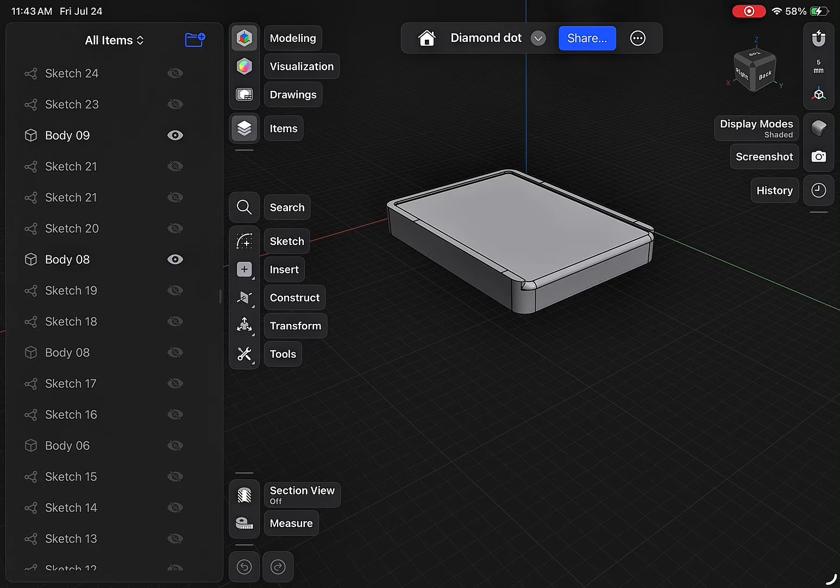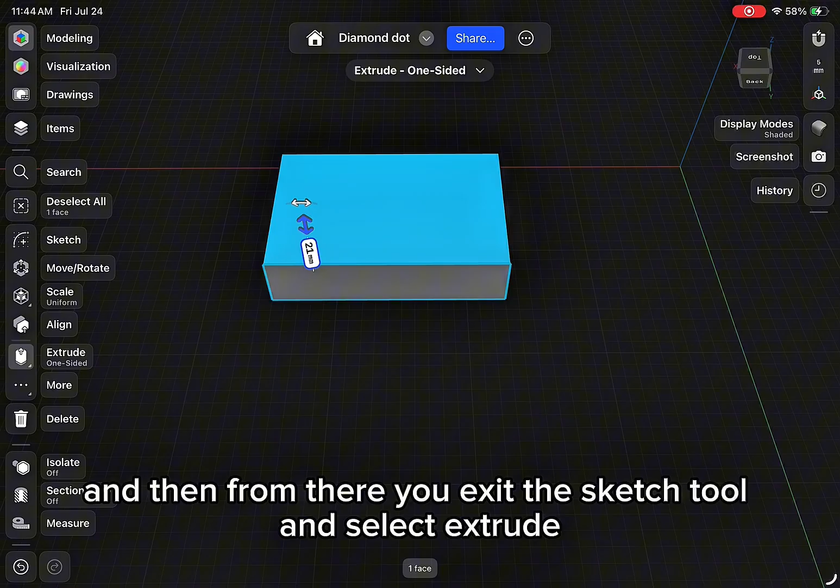Hi everyone, Steph from Pages and Projects here, and I am going to show you guys how I designed something in Shapr3D. So here you go into the sketch tool, and I'm using the rectangle to just create an outline, and then from there you exit the sketch tool and select extrude. From here I'm using the shell tool to get that nice shell.

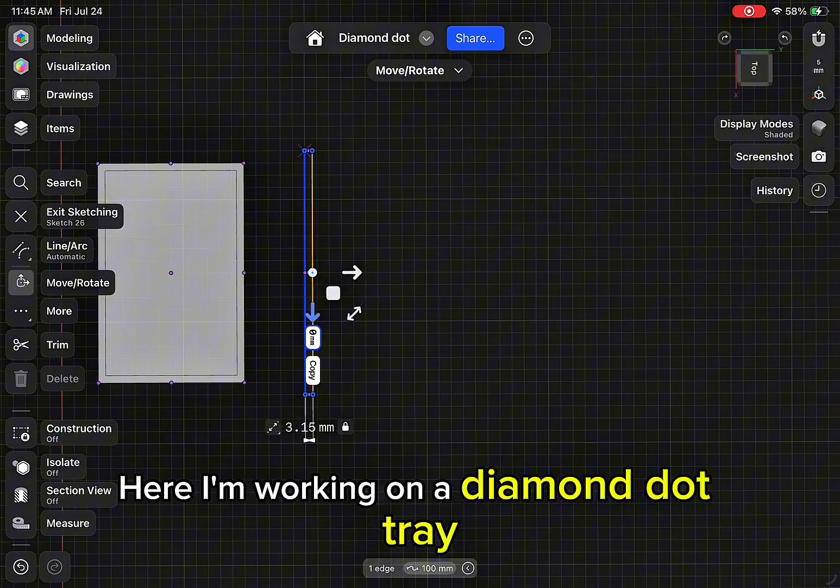From here, I am going to start working on what will become a pattern that I will then project onto my rectangle here. I'm working on a diamond dot tray. So this tray is going to help store and sort the little diamond dots when I'm working on stuff. So I'm making, again, a pattern here for those slots in the diamond dot tray, which I will then project.

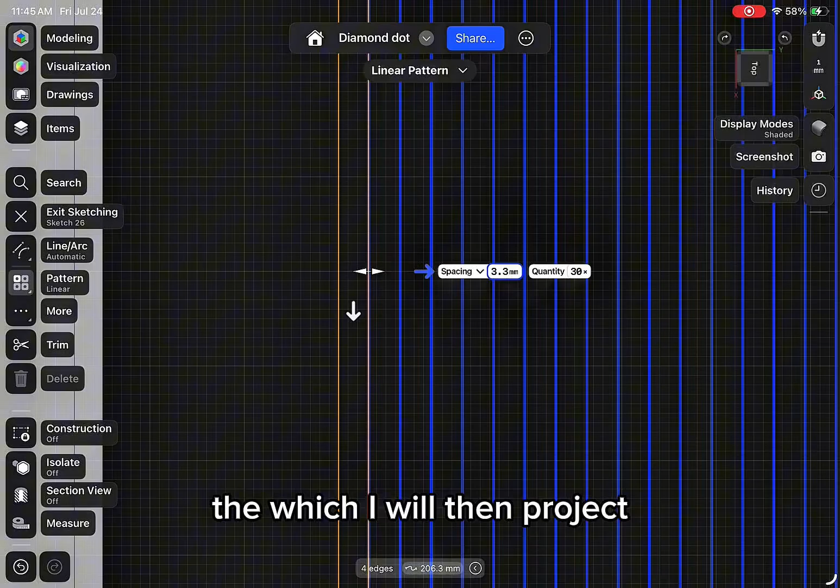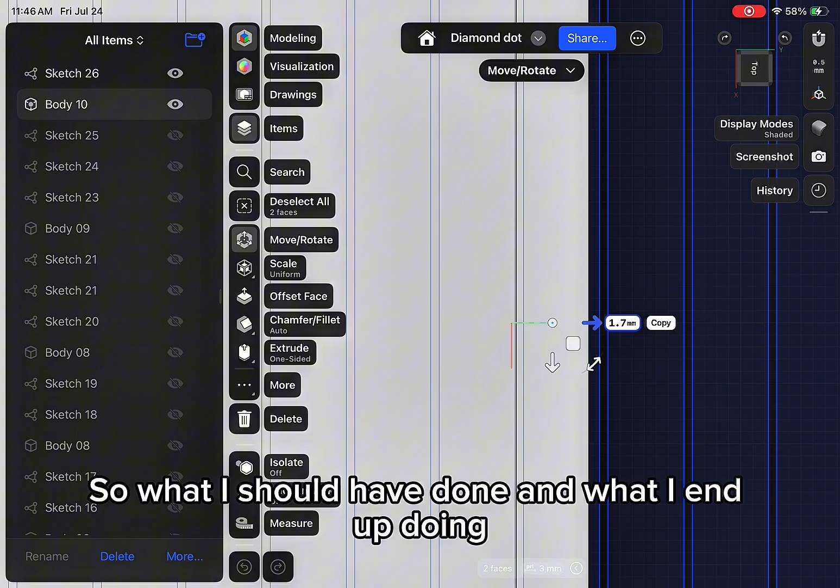What I end up realizing is that because I don't actually want to project this whole pattern against the full shape here, I actually want the little indents or ridges to be sort of within, like I want blank spaces above or below. So what I should have done and what I end up doing is create a rectangle essentially to project onto the space there before projecting this pattern on there.

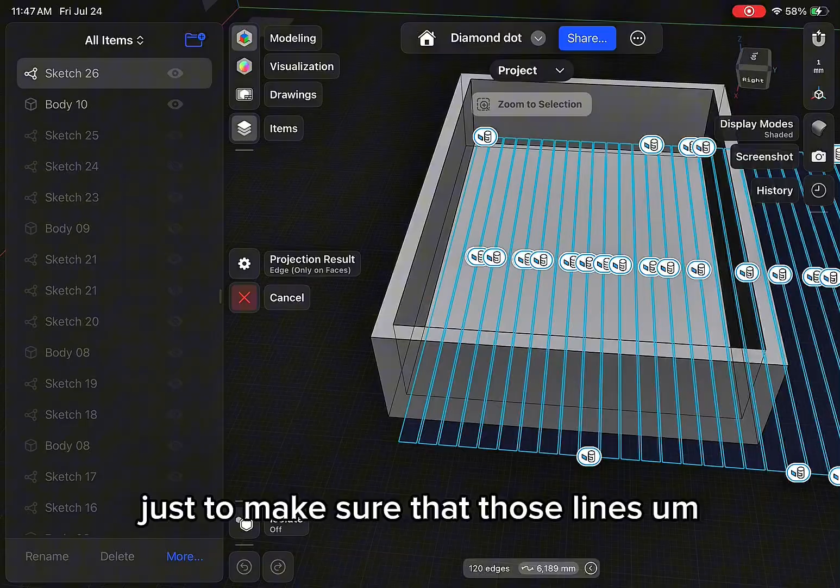And then you'll see here. So I am just messing with the overall shape just to make sure that those lines sort of match in there perfectly. And then from there, I projected it. So here I am now realizing the error of my ways. So I am debating on what to do next here.

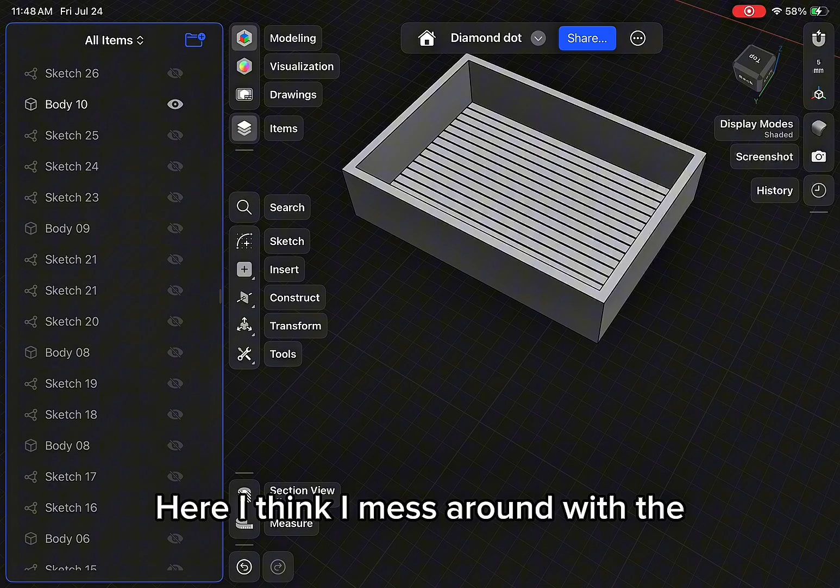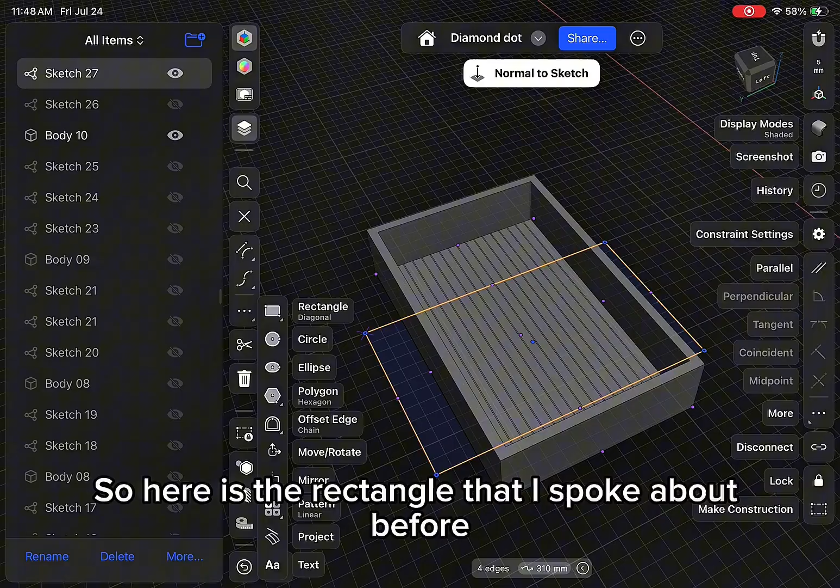I think I mess around with the top and bottom pieces to see if I pull them out to see if that would work. So I select the top and bottom face there, and then I use the move tool to sort of drag that down. But as you can see, it just drags the lines with you. So here is the rectangle that I spoke about before. But the problem here is if I project it at this point, I'm going to have to select every single face in between those lines.

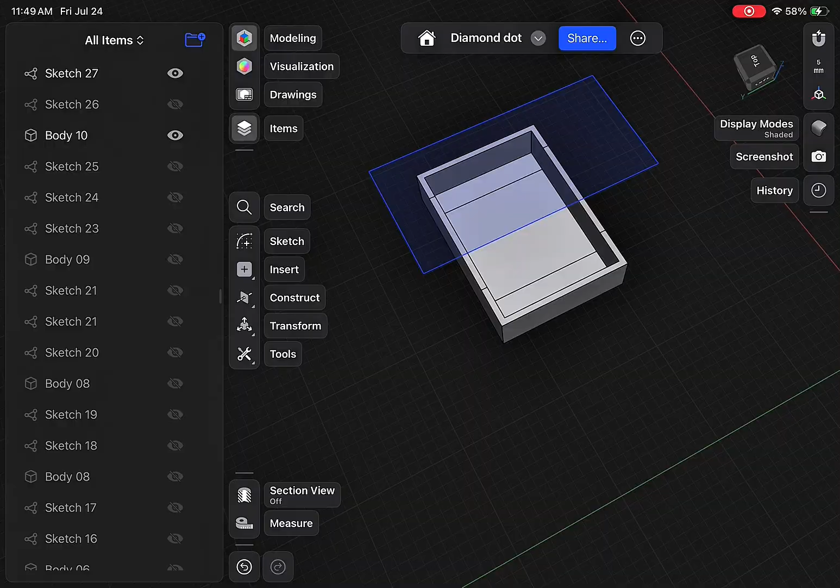So here I end up undoing a few steps. I go back, I start with the rectangle, I project those two lines onto that surface as a step one, and then I take my pattern and then I project that onto just that middle section there. So it sort of separates it out. And there you have it. And that's what I was going for. We got there in the end.

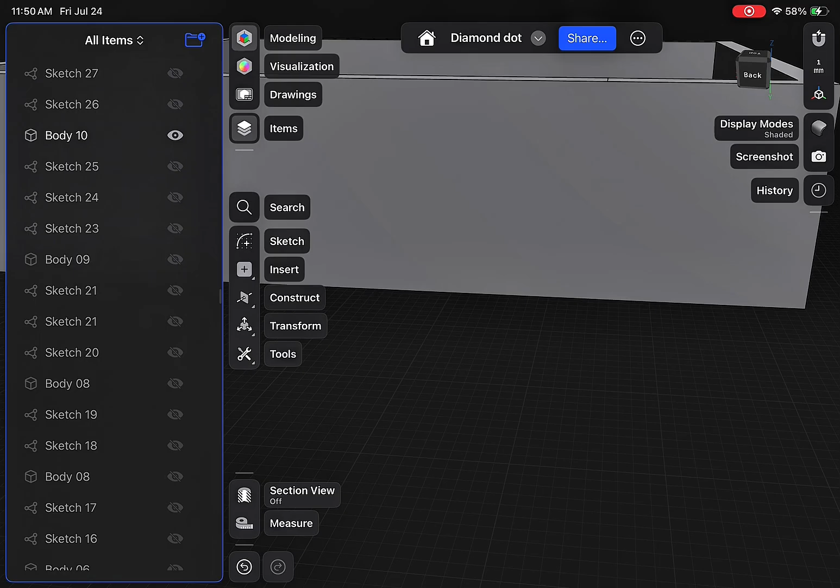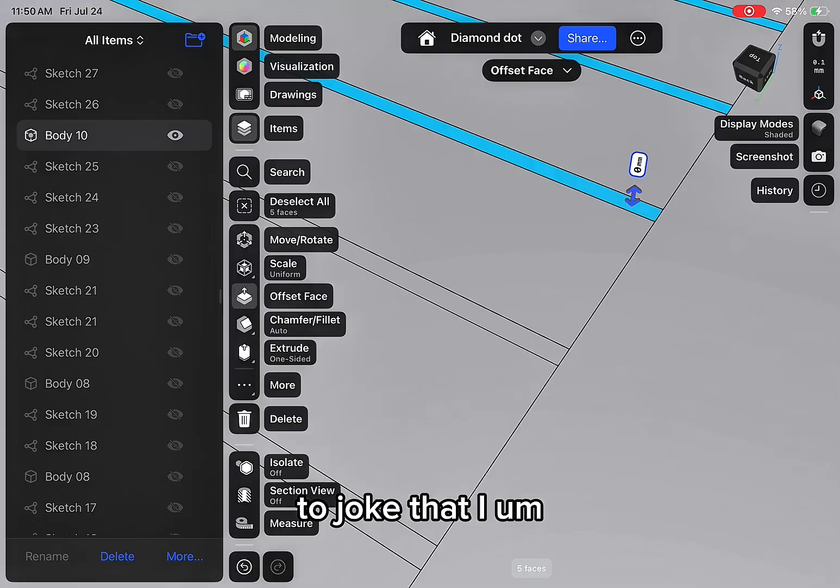I feel like so much of design and so much for me in Shapr is just trial and error, you know? I like to joke that I fight with Shapr a lot. Here I am selecting all of the faces there that I'm going to eventually extrude up. I think here you can either use offset face or extrude and it'll give you the same end result.

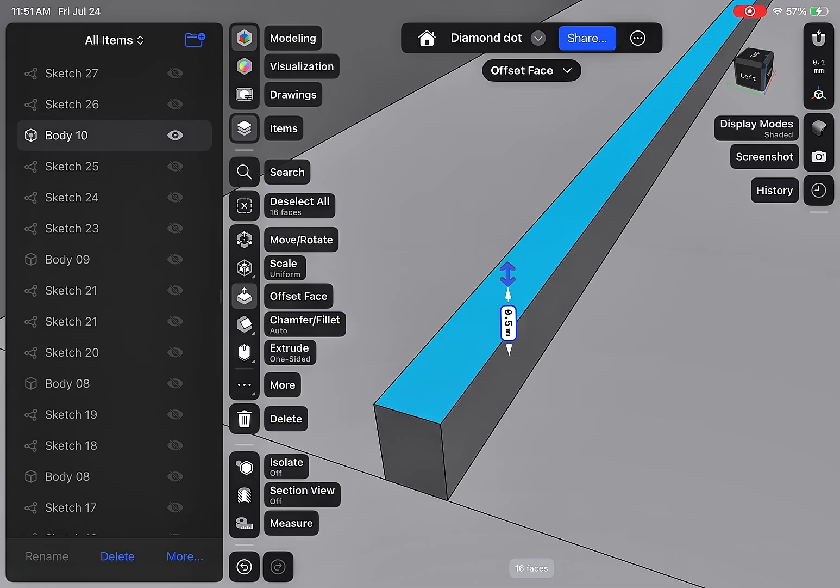Sorry if you can hear my children yelling. It's just what children do.

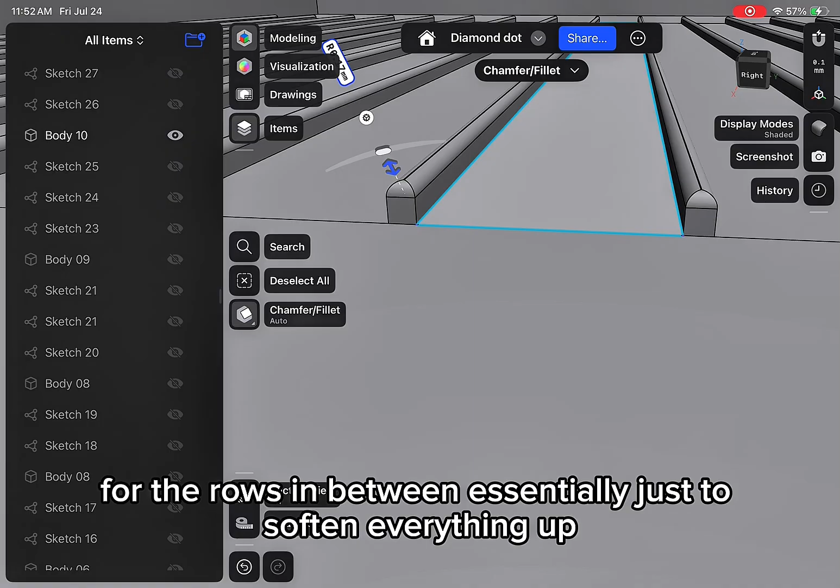From here, I selected those same ridges, just the top portion, and I'm chamfering the edges just to smooth them out. And then I'm going to do the same thing for the rows in between, essentially just to soften everything up. I'm trying to figure out the best way here of selecting all of those said ridges, so I'm using the select tool, and there you go. Made it there again in the end.

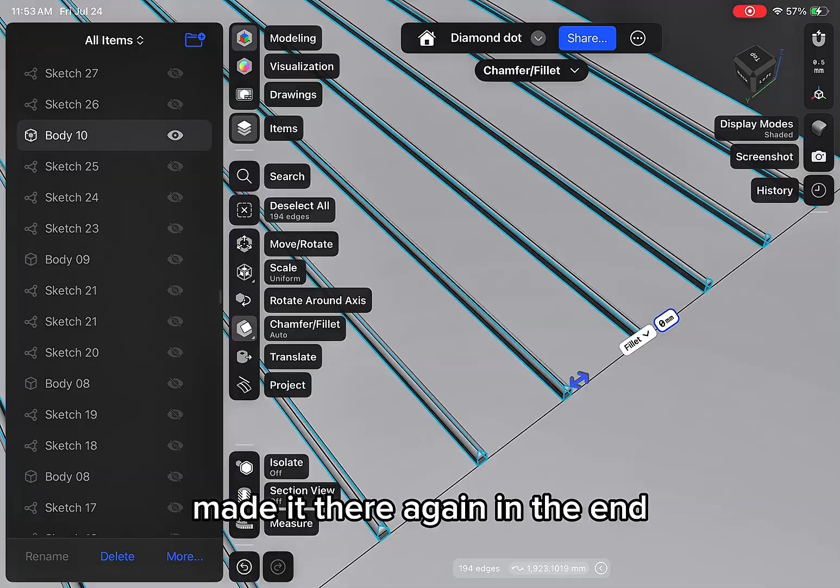So from here, I'm again using the chamfer tool to just curve that out and going as far as Shapr will allow me. There you go. Pretty little bumps.

Don't know why that sounded.

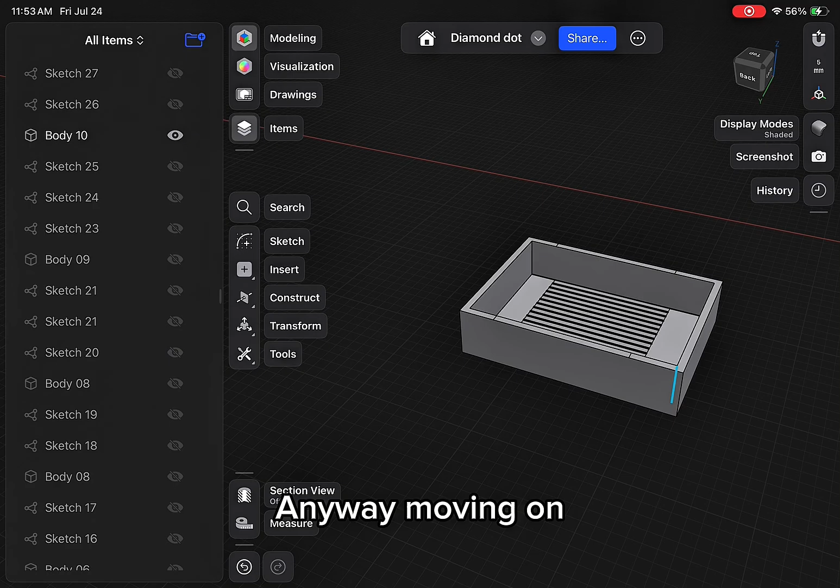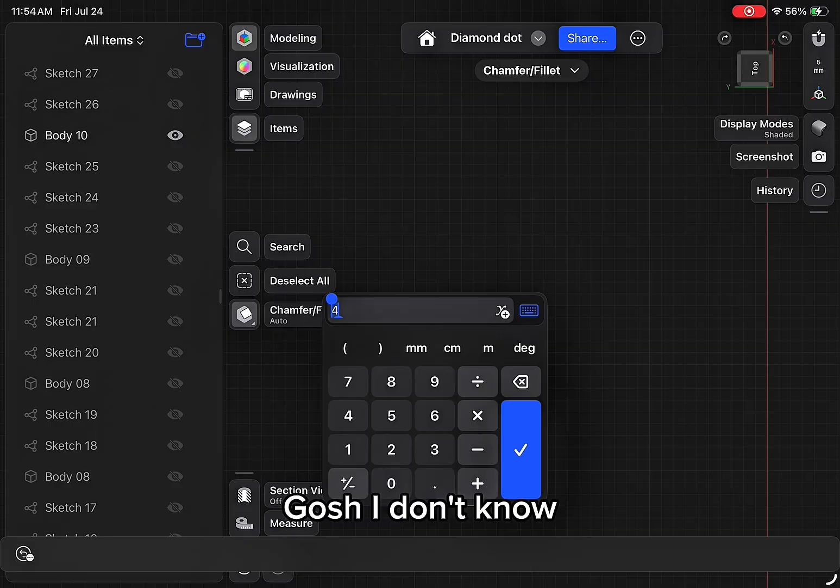Anyway, moving on. So from here, I'm again just sort of messing with the ends. And I've now decided that I want the ends or the corners to be rounded. So I am selecting the edges, both inside and out, and then using that same chamfer tool. Is it chamfer? Chamfer? Gosh, I don't know. I probably should have looked that up beforehand, but you can see it on your screen there. So there you go. Kind of rounds everything out. Looks nice. And I think what I'm going to do next is work on the lid.

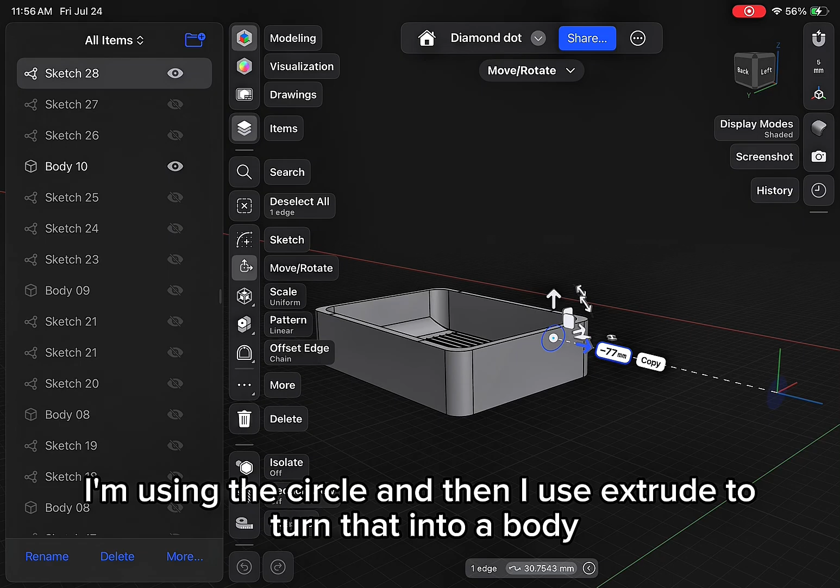Oh, no, I'm lying. The first thing I'm going to do is put a little slot almost in there. And I do this on a lot of my book nooks and lanterns or any sort of container. So I'm here using again the sketch tool. I'm using the circle. And then I use extrude to turn that into a body. But if you extrude something into another body, it cuts a hole in that body. So I do that to make a little slot there.

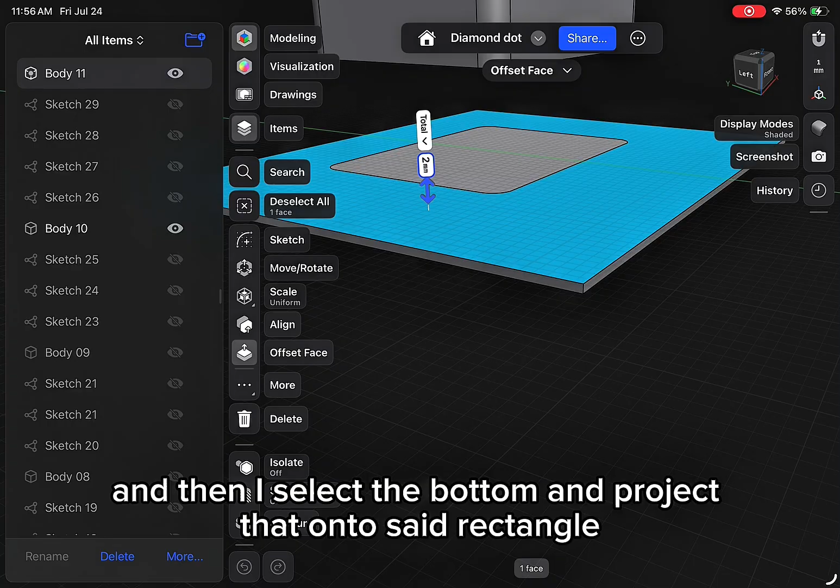And now I'm working on the lid. I use the same sketch tool. I just do a big old rectangle and then I select the bottom and project that onto said rectangle. It's the easiest way to get that shape back there. And then from there, I just offset edge a little bit because I don't want it to be the same size. I want it to be a little bit smaller. And there you go. And I have my lid. Pretty sure I stopped this video here shortly.